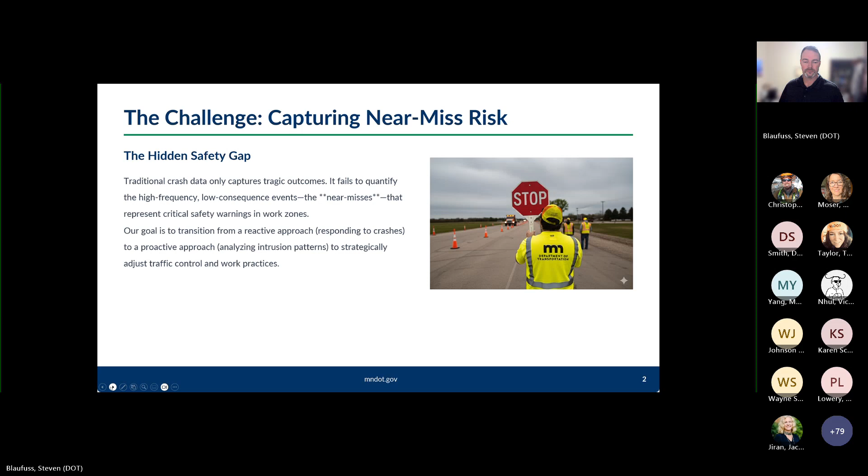So when it comes to the actual safety and data, it's no surprise that we have an issue when it comes to work zone incidences. And as a note, since 2023, we've had on average about 123 worker deaths within construction sites, and that is a huge problem, something we're trying to combat against. There's a lot of different elements that kind of play into that.

But one of the things we try to do, and I'm sure many of you have tried to come up with ways to try to mitigate incidences where the general public would enter our work zones. And so this is one way that we can try to measure that and get a sense for what are some of the common themes in which those incidences are happening.

And by logging that, we can kind of determine whether or not there is an area within maybe a specific layout that is being used, or maybe it's a road type or a time of day, things like that, because we can try to adjust and make some changes to prevent some of those things.

There's another element to this too, is that if we do find that there is a problem, the number of occurrences is important as well, because of the anecdotal information that we get from field staff saying, yeah, we have intrusions all the time. Well, the issue with that is if we don't have the data and the actual record showing what the circumstances were around that and giving detail as to why, we have very little recourse in which we could use that information, maybe in a much higher level.

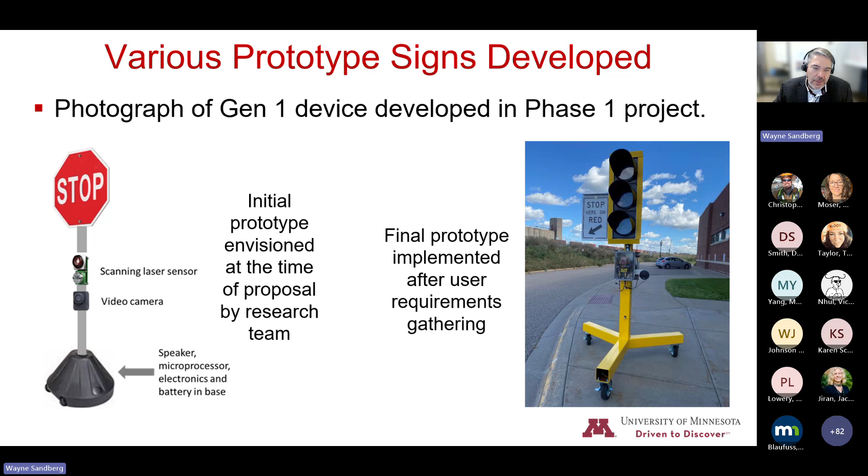Also, after gathering user feedback, we decided to pivot toward a more intuitive design using a mobile traffic light system with more of a clear message, stop here on red. This version actually improved driver compliance, but still wasn't where we needed to be as far as portability and affordability.

So in phase 2, we built a more rugged device based on simulator study outcomes. This version included a radar, camera, and a speaker mounted on a wheeled box with a dual telescoping pole system. So the sign could rotate between stop and slow modes, and the upper pole was removable for transport.

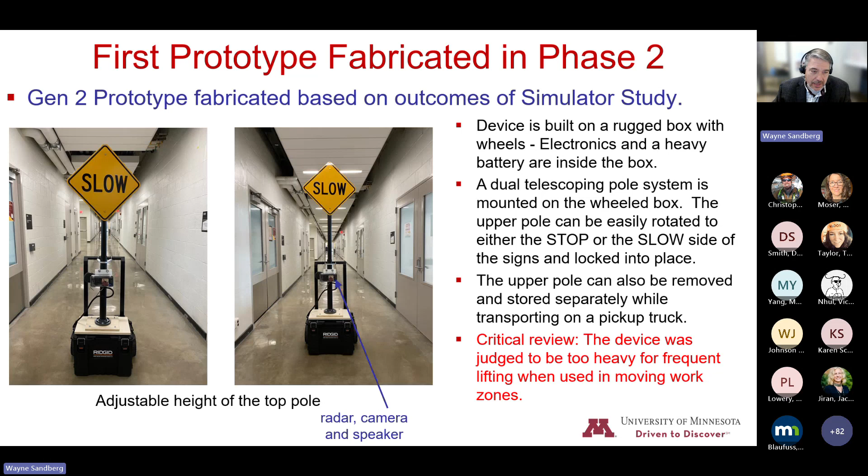However, this unit was too heavy and too cumbersome for frequent lifting and moving in work zones, and really was moving away from our initial mission. We weren't trying to create an auto flagger. We got some good feedback and some testing, and it pushed us to rethink the portability aspect and the ease of setup, and led to what we call the Gen 3 prototype.

So the third generation prototype is much smaller. It's housed in a waterproof toolbox. The stop slow sign is no longer connected to the device. This has now become a standalone device. That was a critical change because it allows us to place the device upstream of the work zone, away from the flagger, but ahead of the flagger position.

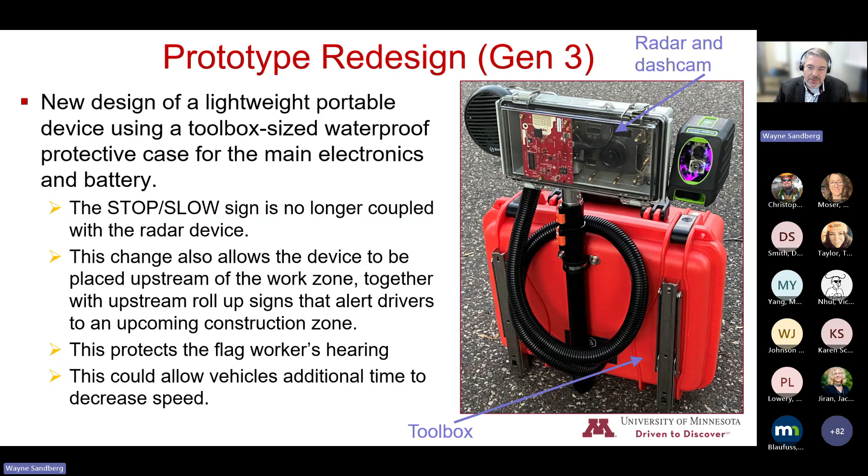It also could allow us to use more than one device to be placed in the work zone. So you could potentially have multiple of these to increase reliability and connection to the driver. And we found that the portability also gives drivers a better warning, but it was easier for the workers to manage. So it weighed just 16.5 pounds.

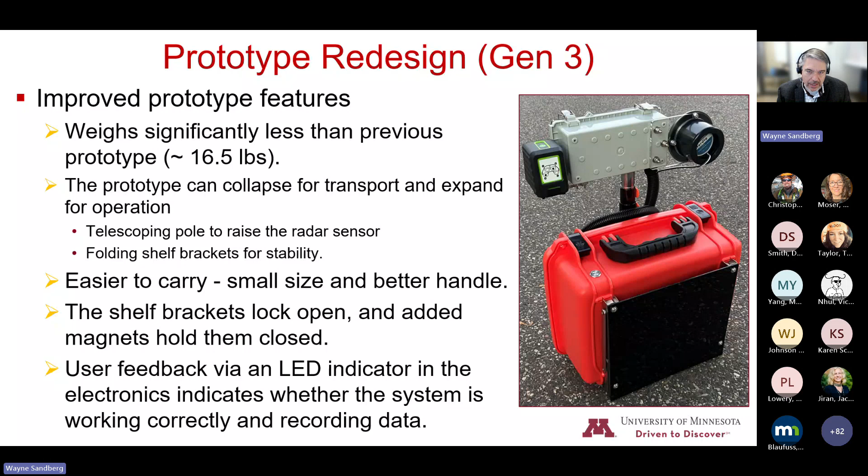The unit collapses for transport, expands for operation with a telescoping pole that raises the radar. It has locking brackets for stability and an LED indicator to confirm that the system was active and recording.

Setup we found was fairly simple and straightforward. It was easy for people to do without a lot of instruction. They place the unit on the ground, extend those leg brackets, extend the pole, align with the lane, and press the power button. There was no need to get into the electronics or open the case unless there was a battery issue.

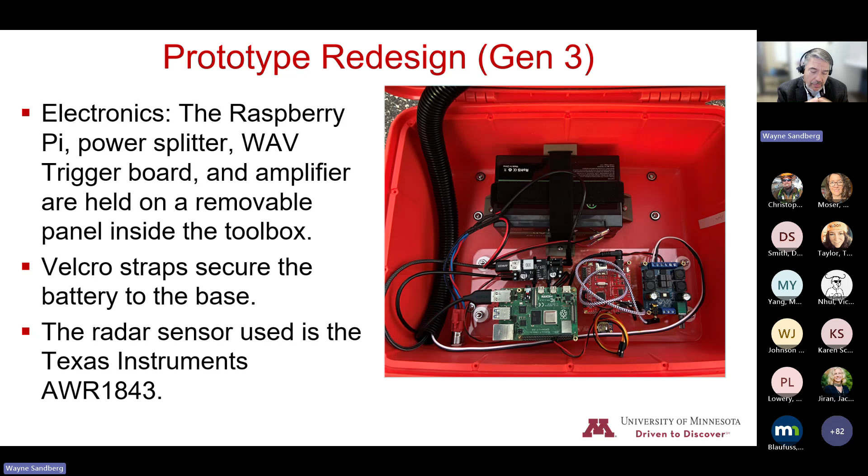But inside the case, if you want to see inside, it included a removable battery. The brain of the system is a Raspberry Pi, a pretty much off-the-shelf product. Some other details in there: the WAV Trigger board, the amplifier, and power splitter. The radar sensor was also an off-the-shelf product, a Texas Instruments AWR 1843. So overall, the system was pretty compact and reliable and also very affordable. That radar system was less than $500. So total all-in is right around that $500 mark, $500 to $600.

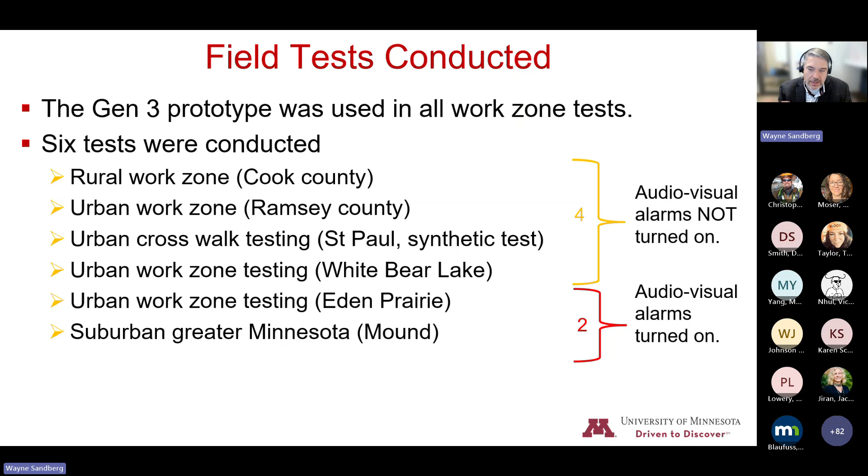So we conducted 6 field tests across rural, urban, and suburban sites. In 4 tests, we left the alarms off just to evaluate the vehicle tracking feature capability of the device. Then in 2 tests, we added the alarms to actually activate, to see how drivers would respond to it.

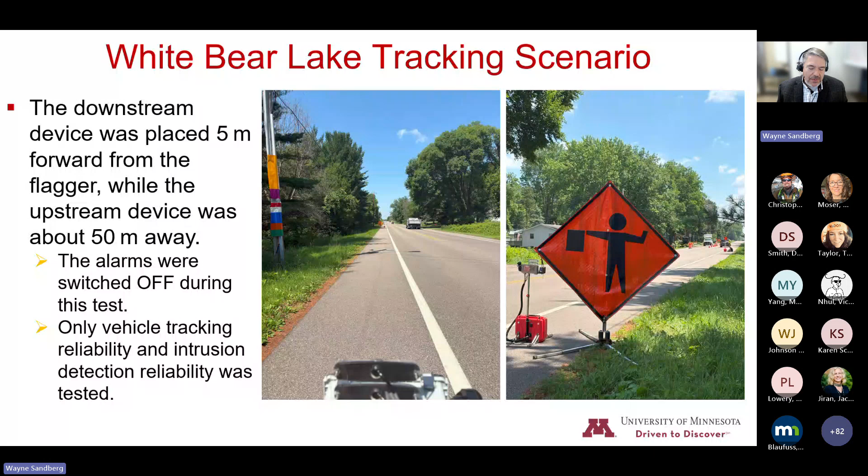I'm not going to go through all the sites, but I'll give you some examples. The first one, the urban site, allowed us to test intrusion and detection in active traffic. The system was evaluated for accuracy and alert timing under real world conditions. So what we did was place devices 5 meters downstream and 50 meters upstream from the flagger. Again, the alarms are off here just to focus on vehicle tracking and reliability.

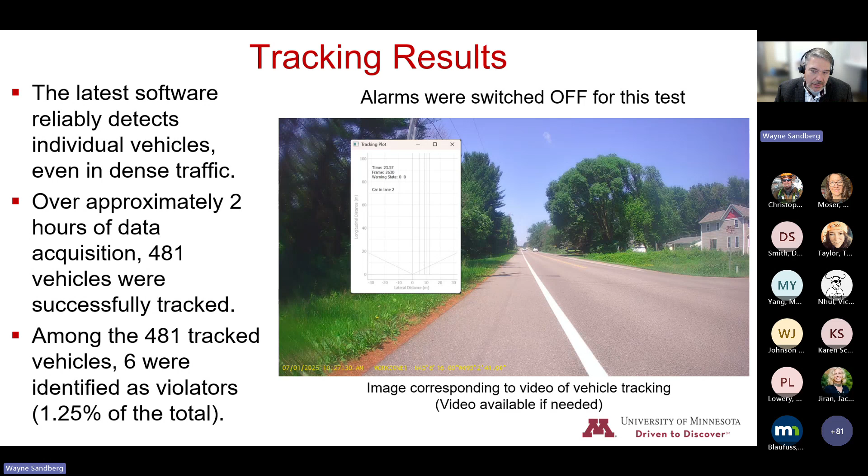Over 2 hours, we tracked 481 vehicles. 6 were identified as violators, meaning that they were coming in too high of a speed or weren't decelerating where we thought they needed to be to really slow down appropriately. So about 1.25% demonstrating this shows an ability to really detect unsafe behavior.

We tested different deceleration curves to try to determine when a warning should trigger. You don't want to overwarn drivers who intend to stop, but you also don't want to miss drivers that need that warning. So we really looked hard at various deceleration curves and plotted where vehicles are coming in these real world tests. And we came up with a 0.175 G threshold, meaning the rate of deceleration. At 9.81 meters per second squared, 0.175 G would be a 1.72 meters per second squared deceleration. We determined that would be the appropriate line; if they were above that, they would get a warning.

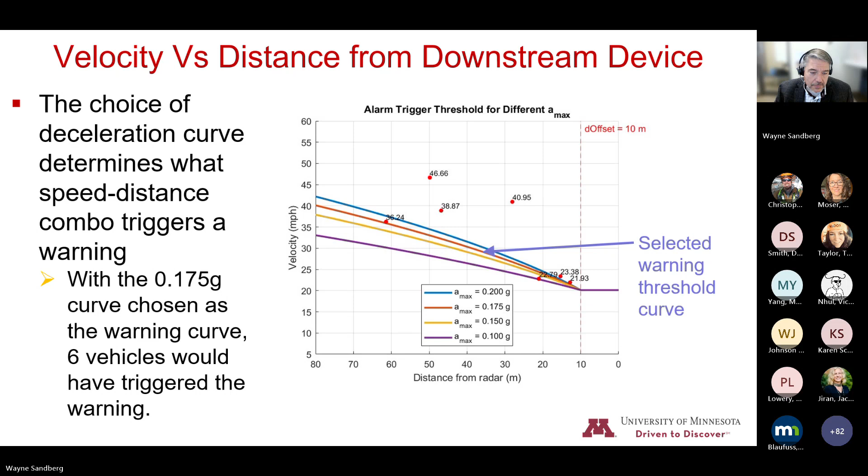So the suburban site offered a different environment. Both devices had the alarms on here, and we wanted to test both the reliability and the effectiveness of that sound on driver behavior. So we placed the device upstream. Initially, it was issuing too many warnings, so we had to tweak that. The downstream device was only activated in stop mode.

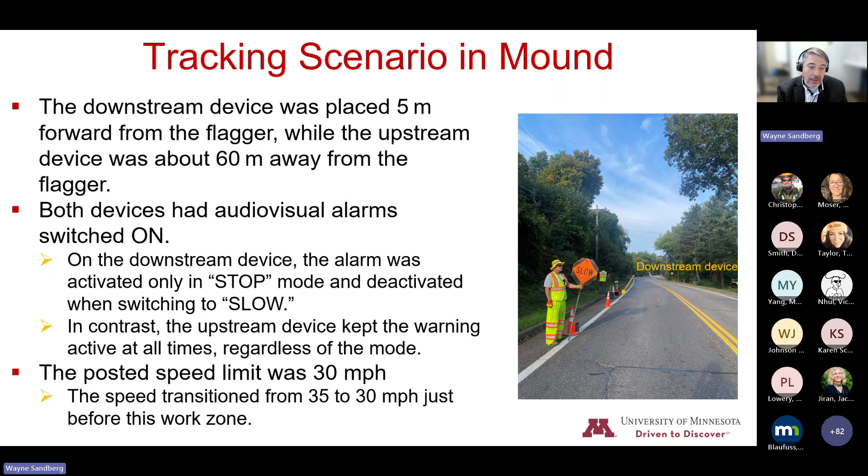The posted speed limit also dropped just before this work zone, from 35 to 30. We think in hindsight that may have influenced the drivers' speed coming into the work zone—they weren't behaving illegally, but they were going faster than the system was expecting. That may have influenced some of this test. But with that said, we still thought we had great reliability. In 1.5 hours, we tracked 66 vehicles, not a super busy work zone. 11 received upstream warnings, and of those, 5 also triggered downstream alerts. 4 others only triggered the downstream warning.

This chart graphs the velocity curves coming in. It's a little messy, but we analyzed the trajectory of those 11 violators. Most drivers began braking within 1.5 to 4 seconds of receiving that audible warning. So we think that showed they did hear it, and it did cause them to change their behavior. On this graph, the star markers show when the warnings were issued. With driver reaction time, there's a bit of a delay from when we issued the warning until you see the curve drop down.

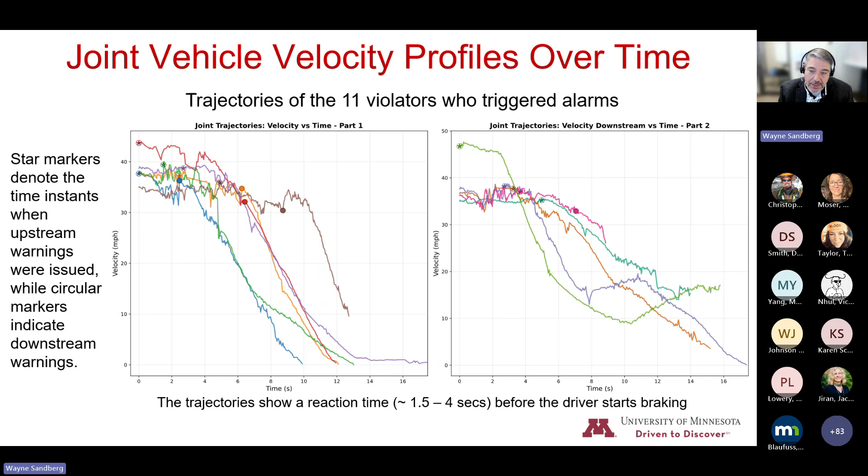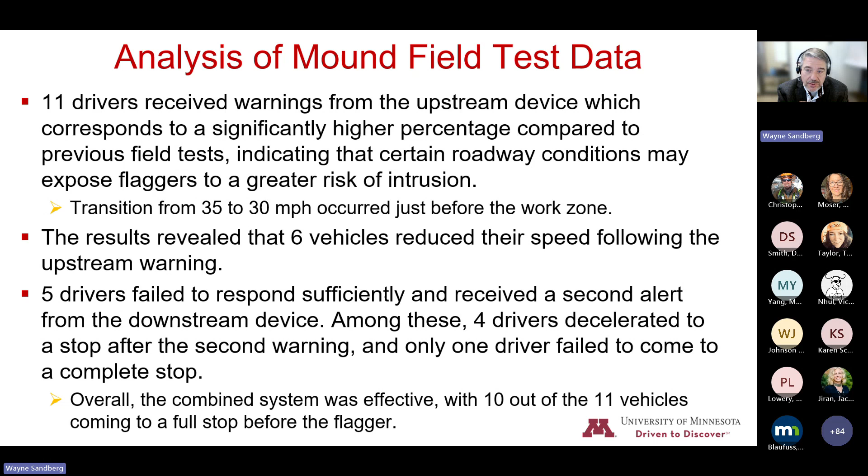A notable one is that brown curve on the left side. You can see we gave the warning, and then you start to see driver behavior drop after a few seconds. So we think the curves reflect that drivers who did receive warnings did react and did slow down. Of the 11 violators, 6 slowed after the upstream alert, 5 required that second warning, and 4 of those stopped completely. So in total, 10 of 11 vehicles did come to a full stop before they reached the flagger.

The system actually records video of what it's seeing and can record violations. I don't have the video to share here online, but it is very accurate, very robust. It can detect not only vehicle location, but deceleration of the vehicle.

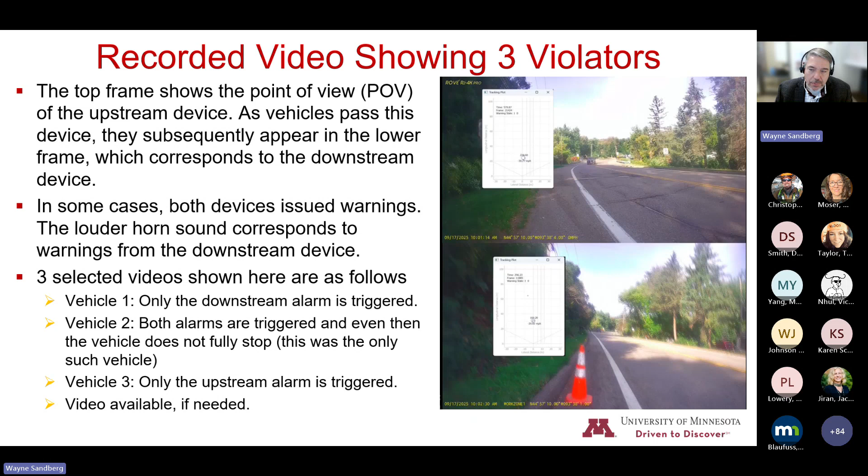So the actual technology was very robust and very reliable. Across all 6 tests, we were able to track every vehicle. We didn't miss any vehicles when it comes to tracking, which is important for reliability and trust in the system. Later tests added more mode-specific warning curves and audio-visual alerts.

In Eden Prairie, no violators were detected. In Mound, 10 of 11 violators stopped. So we thought that was also validating in the fact that we weren't over-warning people that didn't need to be warned.

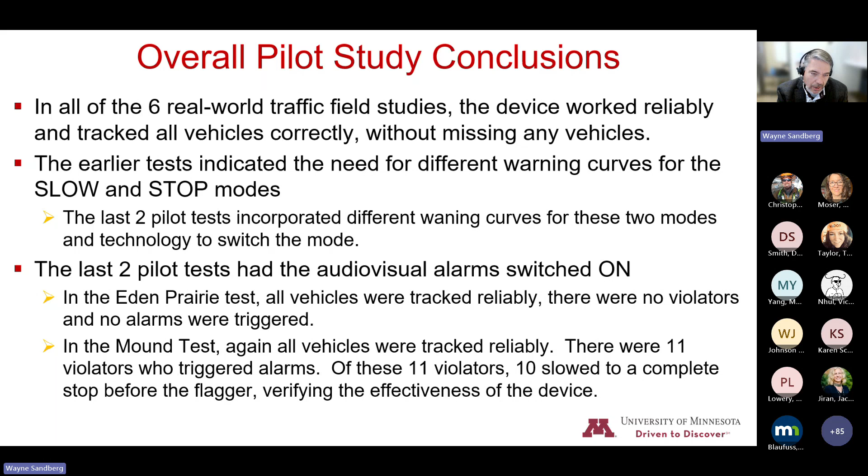So that really is the summary of the test. That's where we've left off. It is still in a prototype mode. We have not moved to the next step. I want to thank everyone again for their attention today, and just generally wrap up.

Across those 6 field tests, the Gen 3 prototype worked reliably. It tracked every vehicle. We did not miss any detections. Those mode-specific alerts and upstream placement did give drivers more time to respond. Decoupling this from the sign itself was a good move and allowed us to add more units to the work zone. And in our final test, 10 out of the 11 violators did come to a full stop before reaching the flagger. So we took that as also evidence that the system worked.

I think what we showed and proved here, our initial question was that yes, an audible warning system coupled with some visual cues can influence driver behavior. That audible warning can be heard inside the vehicle. It's loud, about 110 decibels. We also learned that portability was really important. So generally, we think we proved what we set out to prove, and that the next step would be to take some more studies and see if this could become more of a marketable product.

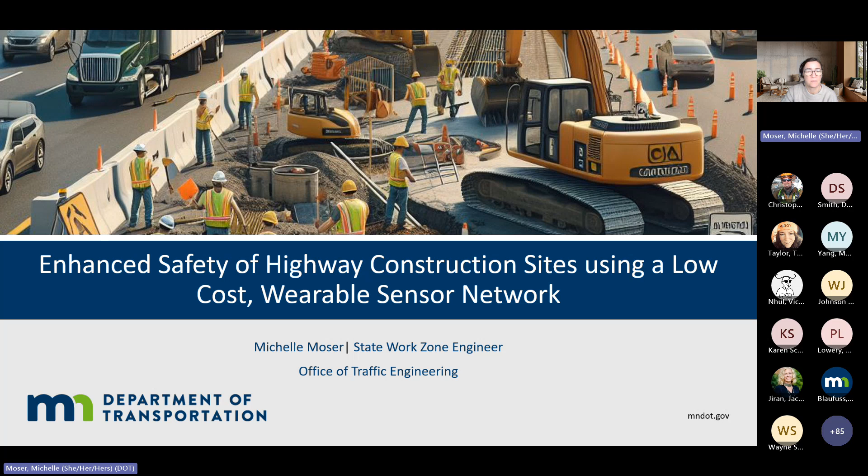So first up, why does this matter? Well, highway work zones are dangerous places, both for the traveling public and for workers, as there's a lot of changing conditions, things happening, a lot of things to be distracted by for drivers, and then those distractions can sometimes prove very dangerous for our workers. So there generally is over 800 fatalities and about 40,000 injuries annually in the US in work zones. Those aren't all workers, thank goodness, but they are drivers and workers across the board.

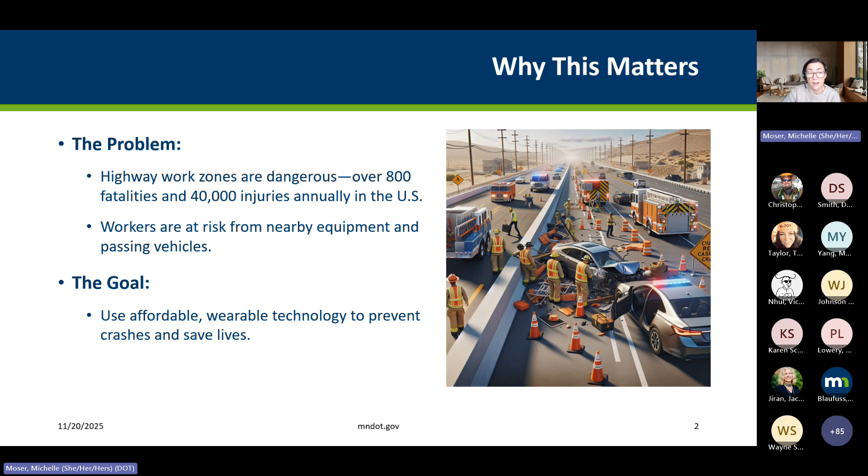So there's room for improvement on this. Workers are at risk from both nearby equipment, as we've seen in recent incidents in Minnesota, and from passing vehicles too. So our goal was to use affordable, wearable technology to prevent crashes and save lives.

So the system design was a safety sensor system that includes a wearable alert device for workers, sensors on construction equipment, and intrusion detection on traffic cones or other delineators, and then a cloud-based dashboard for supervisors or others in the office to use to monitor or look at data after the fact.

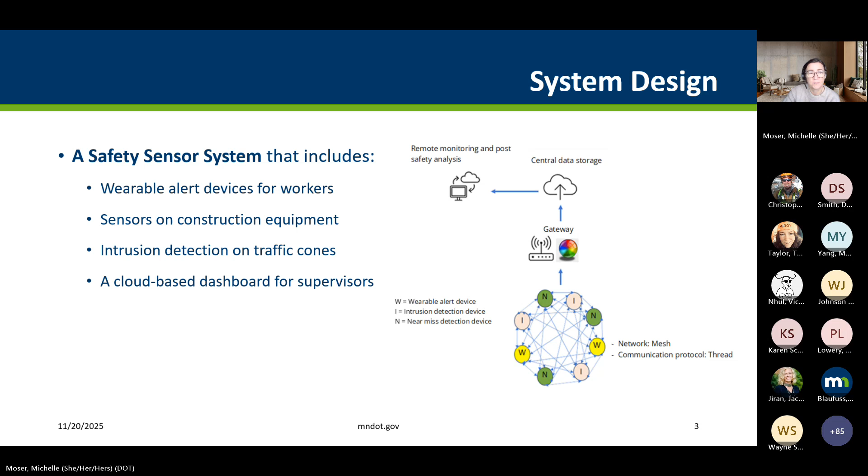So workers and equipment have GPS-enabled devices on them. Those devices talk to each other through that wireless mesh network. And then if a worker gets too close to equipment or a vehicle enters the zone, that worker will get a vibration and a sound alert. And then also anyone in the office who is real-time monitoring it can see that on their web dashboard. They can also gather that data afterwards on how many potential incidents there were that happened in that work zone.

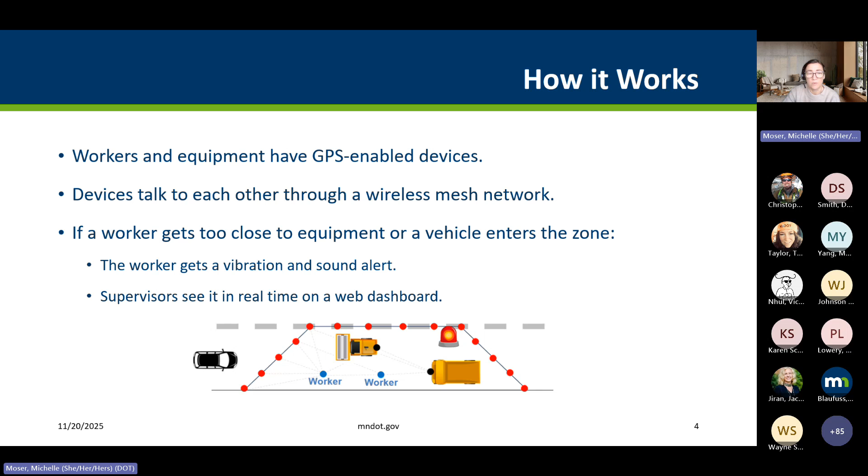So again, a graphic here shows that network in a work zone layout. Delineators with devices on them, equipment and workers with devices form that network around that zone. And it can detect that vehicle entering through that barrier made by those delineator devices, and then within the work zone between workers and equipment.

So key features of this system — a key feature was for sure to make it low cost so that it's affordable and scalable for many work zones.

Also to get real-time alerts, so to get as close to immediate warning as possible, to make sure that there's reaction time and we can prevent those crashes or incidents from happening.

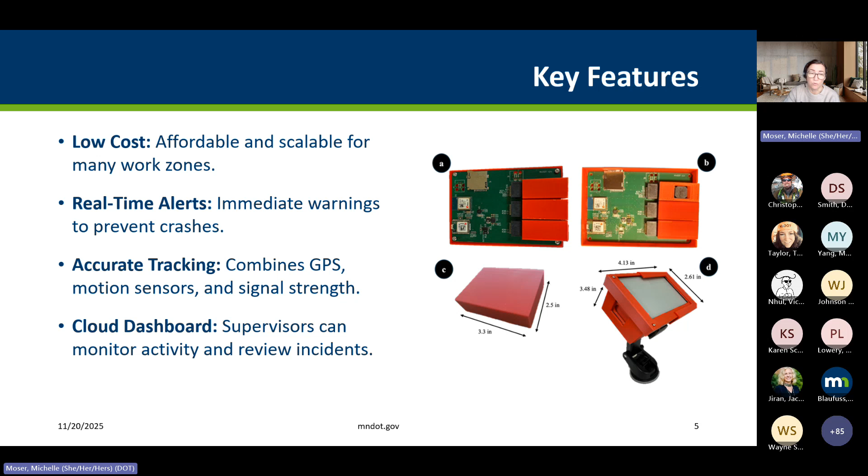Accurate tracking, so combining GPS and motion sensors and making sure that we have high signal strength to give us more accuracy. And then having that cloud dashboard to be able to monitor incidents either in real time or review them afterwards or at the end of the day to kind of take in some of that data on how much or how many intrusions and different incidents are happening.

So testing the system — there was both lab testing, which checked for comfort and alert clarity, device placement, those types of things. And then there was also some real world field testing. We had some great MnDOT crews volunteer and agree to work with these devices and do some real world trials while they were working. The system was able to detect hazards accurately and reliably in that field testing.

We also gathered worker feedback. Workers said this was comfortable to wear, the alerts were clear and helpful, and that they would trust it on a real job. They did have some suggestions to make those alerts louder, vibrations stronger.

If anybody's been in a work zone, it's just a really active, loud environment. There's a lot of noise, a lot of beeping, a lot of different alerts going on. So you can become kind of complacent and tune those out because they're just part of that everyday work. So having something different, louder, stronger, to make sure that they recognize those alerts is important.

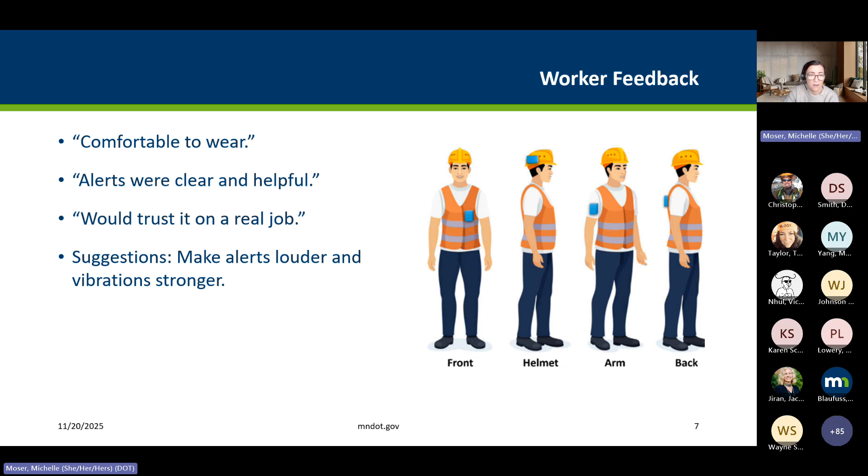Results of the testing: there were 0 false alarms in the field tests, and there was over 90% accuracy in detecting real hazards. This will help prevent accidents before they happen, and they felt that it would reduce paperwork with the automatic incident logging.

Next steps on this project: there is a broader testing need in more work zones. These work zones that we tested it in were fairly low traffic, not a lot of high-speed traffic, not super active work zones. So we are looking to do a phase 2 project in some more active work zones, high-speed traffic, and be able to create a real network with more equipment, more workers and devices.

And to improve that alert hardware, making louder, stronger alerts for the workers. We also need to determine device manufacturing options. Right now these are being 3D printed in a lab, and obviously that's not really a viable option going forward. So we're looking for some manufacturing options, or potentially a vendor that is willing to take this on and carry it forward into the market.

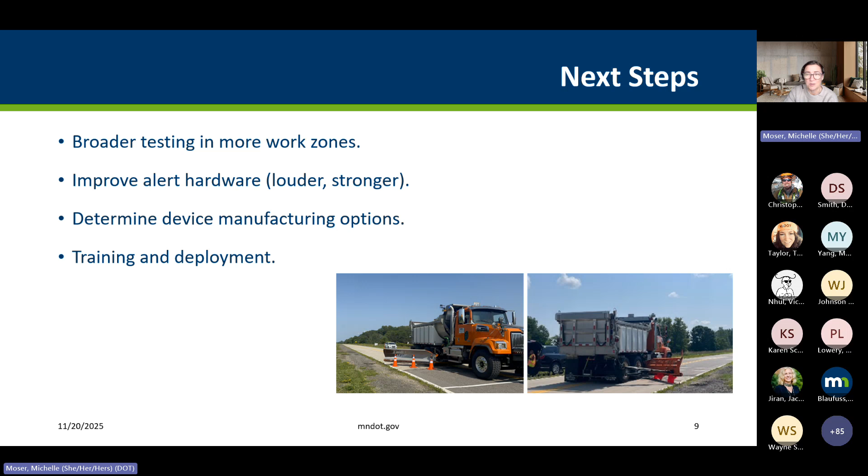And then I wanted to circle this all back to our mission and vision at MnDOT. This really supports MnDOT's goals in safety — safety first, safety always. Anytime that we can do something that will hopefully lead to fewer injuries and fatalities across the board, not only in work zones, that's a key thing we look to work towards.

Innovation, of course — using smart, modern tools, trying to make sure that we are connecting more devices and being able to use technology to our benefit is something we're always looking towards too. And then efficiency: less paperwork and better data.

We're always gathering data that can inform us on how we can improve our operations and making things more hands-off, less paperwork for people to do, and just kind of more automatic tracking and gathering of data are really important too.